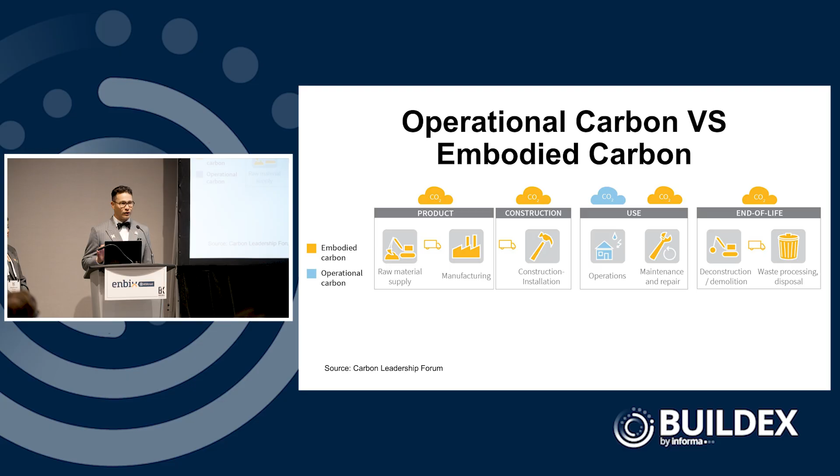Now we also have what we call life cycle assessment, or LCA, as the industry commonly calls it. The LCA document covers a product life cycle in either cradle to gate - so cradle to gate will be A1 to A3, which just covers the manufacturing process of the product. Then there's also cradle to grave, which goes from the manufacturing process all the way to the end of life. And finally there's cradle to cradle, which is if you start off being able to recycle materials and reuse those materials - that would be considered cradle to cradle.

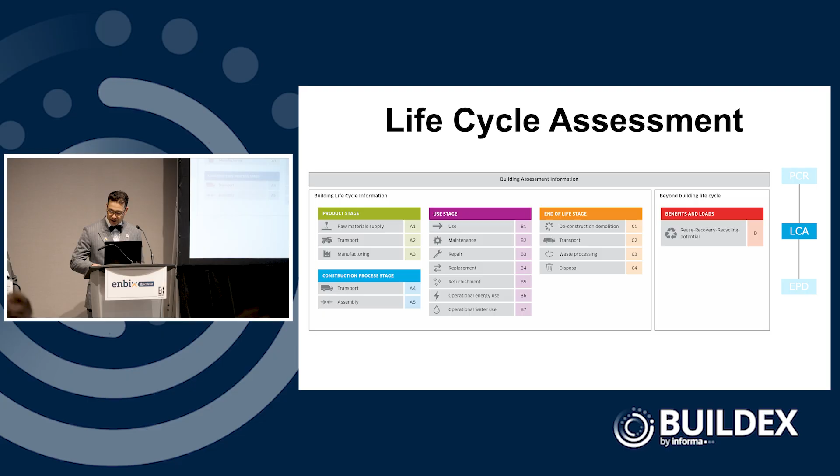With the life cycle assessment they've conducted to determine the environmental impact of either the product or buildings, there are 6 main areas or impact categories that we look at.

So you can see we have global warming potential, which is a no-brainer. Depletion of the stratospheric ozone layer, we definitely don't want that to happen. And acidification, so acid rain, we know how much that impacts the environment.

Eutrophication, which is a measure that uses the potential contribution to nutrient runoff and damaging aquatic systems. The formation of tropospheric ozone, so that's trapping ozone in or providing a layer. And then finally, depletion of non-renewable energy resources. That's the areas that we look at with the life cycle assessment.

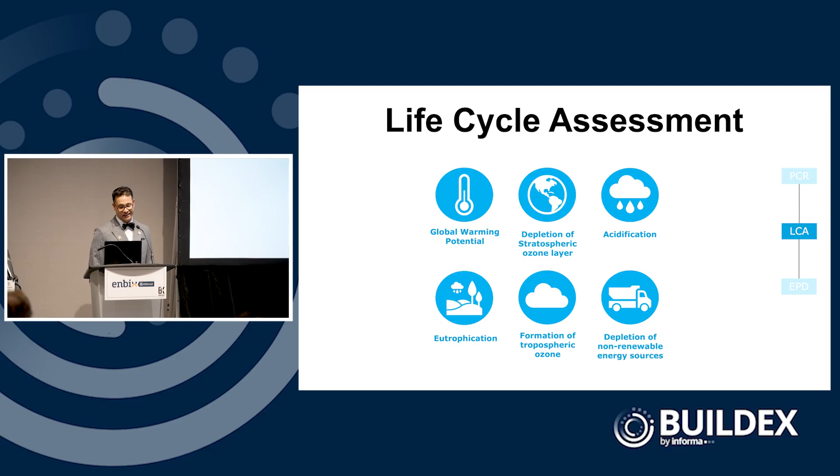So when it comes to EPDs, or environmental product declarations, these are important documents that we're going to see a lot more of. I know as a salesperson before, we used to sell a lot on technical data sheets. Now I think the future is going to be with EPDs.

So the way EPDs work is, first you have to establish a product category rule so that all the products in that category are judged in the same form. Not every product has this yet, but I know they're all working on that.

And then from the product category rule, we use a life cycle assessment to determine the impact of the products on the environment. Once we've collected all that data, we're able to produce an EPD. Then that EPD goes to a third party to be validated, and finally it's publicized.

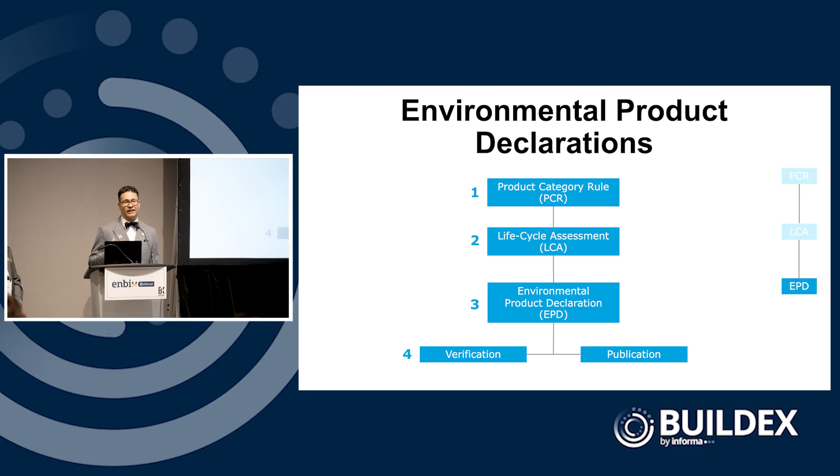Now, EPDs are actually very expensive documents for manufacturers to produce, so a lot of times you'll start to see just industry average EPDs. Some manufacturers will go to that, some products will be there if their industry especially isn't that large, but the manufacturers that invest in doing their own EPDs really give you an accurate guide on what products you're installing and give you accurate information on your material choices.

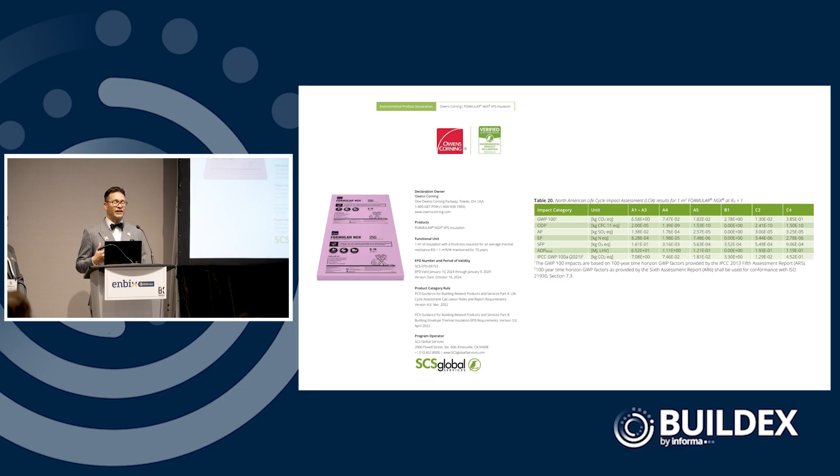For example, Owens Corning, coincidentally I work for them, they have one as well, and it's just to show you an example, but there's a lot of manufacturers out there that do have EPDs. So I encourage you when you're doing a material selection, take a look at that document as well, not just the technical data sheet.

Now, there's what we call a common materials framework, and these are basically language that we're trying to make the industry adopt so that they can have the same language across the board, so we're all saying the same thing.

So there's ecosystem health, which works with the environment, and we want to make sure that we're using products that don't damage the environment. We have social health and equity, which relates to human rights - we don't want to use materials that are maybe produced in a non-ethical way. Then we have circular economy, so if we can use products that can be reused again in the future, we like to use those as well.

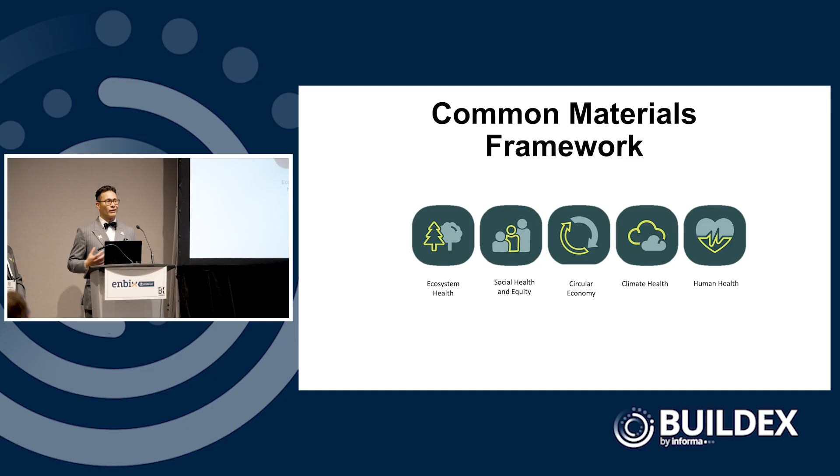Then there's climate health, so of course we want to make sure the climate isn't impacted, and let's not forget us in the room - human health. We want to make sure we're not impacted by the products that we pick.

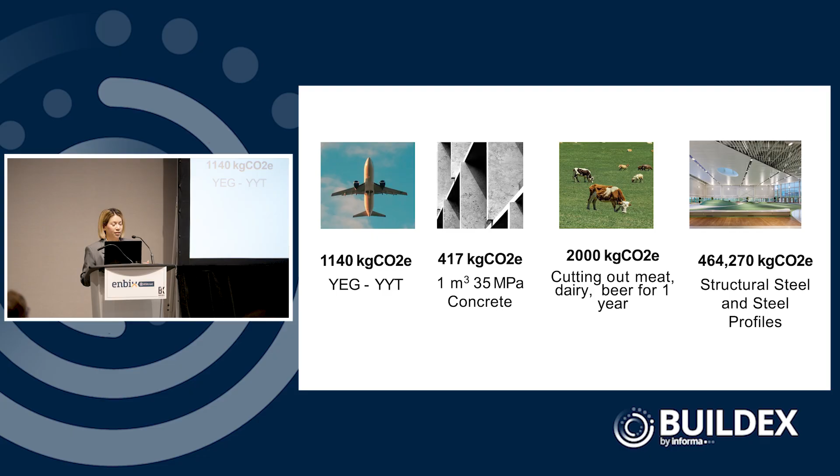It's nothing compared to one project I worked on, a recreation center here in Calgary. Just the structural steel in this addition we did—and we tried our best to identify low carbon steel and opportunities for repurposing—but you'll see that materials really do have the biggest impact. Even if you went vegan, it doesn't come close to just one material on one project.

Going a bit more in depth into social equity, materials are one of the biggest contributors right now to forced labor. Forced labor not only includes child labor and individuals being held against their will, but also the incarceration issue we have in North America. It was shocking to me to find out that a lot of the manufacturers we commonly specify use incarcerated individuals who aren't being treated in an equitable way, and who don't really have a right to fair pay or a fair situation.

This is starting to come down into some of the manufacturing plants. For example, a local steel manufacturer in Canada is one of the only manufacturers globally that has a social equity certification for their steel. I thought that was a really good kudos for Canada.

It really ties into the fact that as of 2023, Canada has a law covering anything entering Canada, regardless of whether it's a construction material or not—there are laws against forced labor. With the greening government strategy and whatnot that the federal government is pushing, that's really trying to emphasize that we need to get better at how we evaluate and import materials.

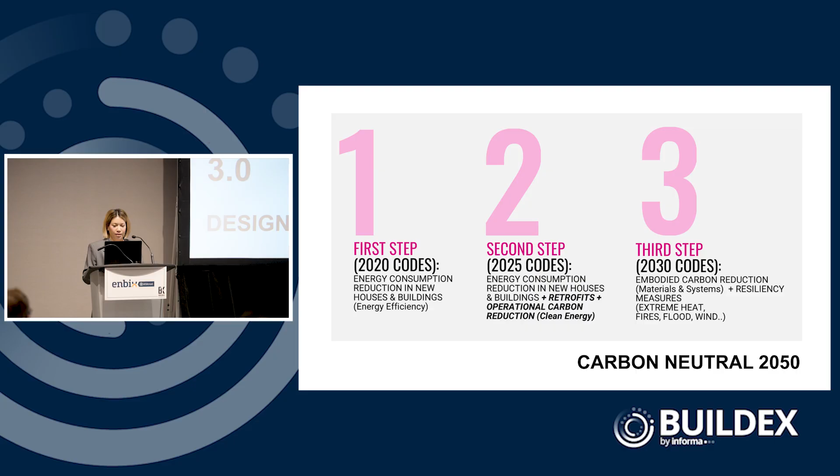So I'm going to go into some design considerations. Some easy wins that you can have is really introduce it early. The design really has the biggest influence. So being very critical of what materials as well as how you use those materials, work with your engineer to figure out placement of structural support to really reduce the amount required.

And to also meet your design service life of your building. The ones further down the list are harder for a consultant to actually have an influence on, especially in Alberta where our grid is considered a dirty grid. We don't have that luxury like other provinces do where we can quickly electrify the building at not much of a cost.

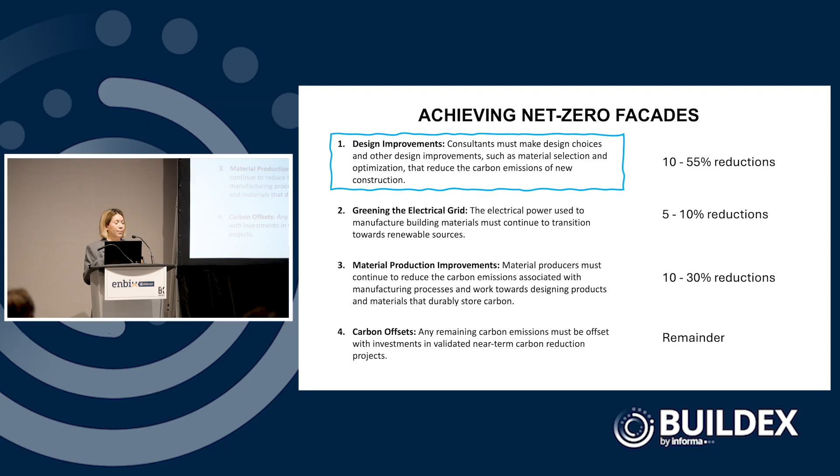And then from a material production side, we don't have the greatest influence on sourcing only true low carbon materials or materials that can achieve different sustainability attributes like carbon sequestration. That's currently in development with some of the concrete work happening in Edmonton. There's a lot of investment happening in capturing the carbon that comes off of heavy emitters from oil and gas and putting it back into the manufacturing of cement.

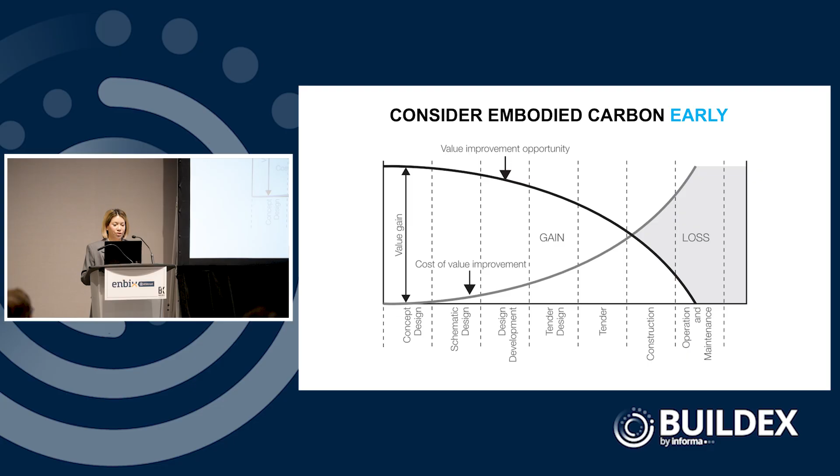And like I mentioned before, the earlier you start to have discussions on embodied carbon, the more you reduce the cost and improve the ability to have that actually achieved on your project. The later you wait in the timeline of a project, the less likely you are to achieve that, as well as considering just the volatility of the supply chain.

And then from conducting a life cycle assessment, this is just our recommendation on when best to involve the consultants as well as the client, and what different deliverables you can implement on your project to really achieve significant embodied carbon reductions. I always recommend, regardless of your procurement or contract method, have that information as early as schematic design and have it priced, because a lot of the materials aren't easy to get low carbon options, and with the current situation we're in with tariffs and everything, it just adds an added layer to it.

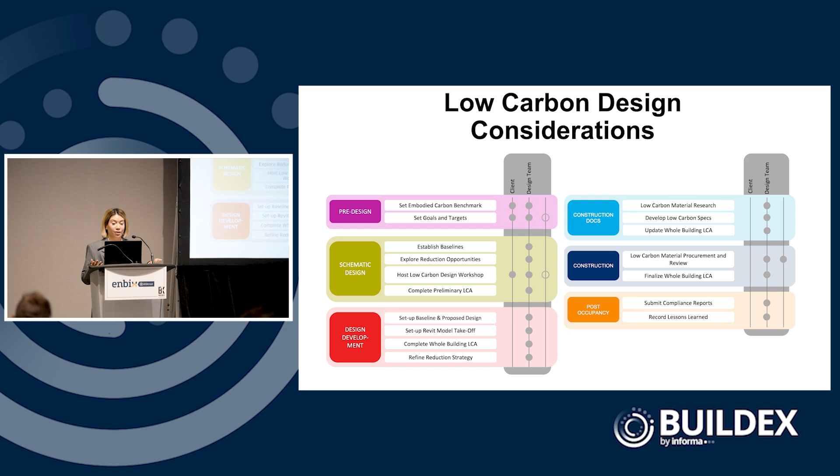Another option I would recommend is having separate prices in your bid so you can see what the cost differential is. And if you have the option, use less materials. I think towards the future, we're going to start doing more adaptive reuse on our projects.

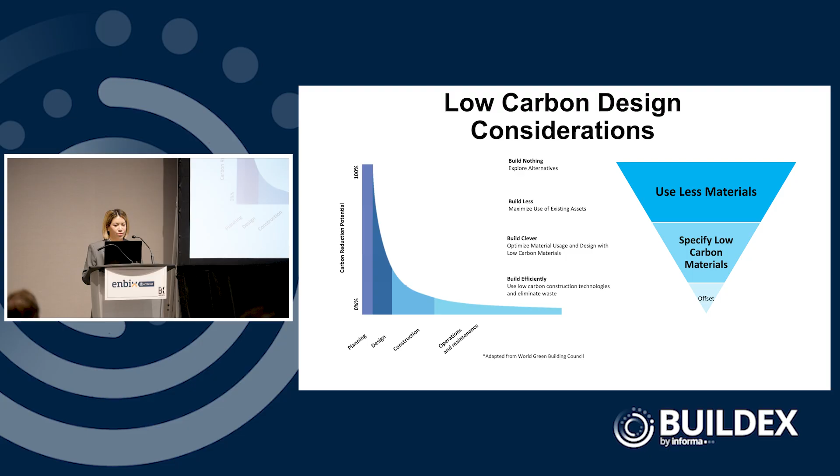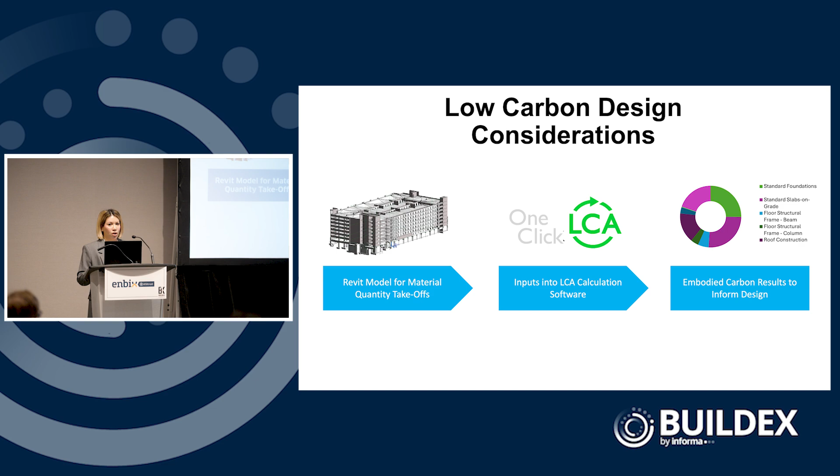Here's another high-level workflow we recommend: having constant life cycle assessments done at different phases of the project to evaluate your current design, as well as conducting life cycle cost assessments to see if your embodied carbon reductions also have cost considerations. I'll pass it off to Andrew.

Thanks, Stephanie. Raise of hands, show of hands—who likes carbon? Okay, good. I was hoping no one else would bring their hand up.

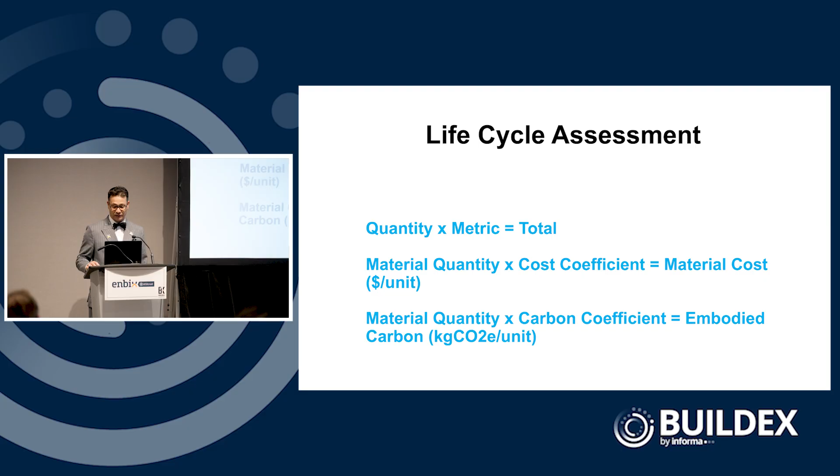When we start looking at total embodied carbon emissions, sometimes in walls especially you have multiple products in there, so you need to calculate them all—take them all into consideration to get that total embodied carbon number.

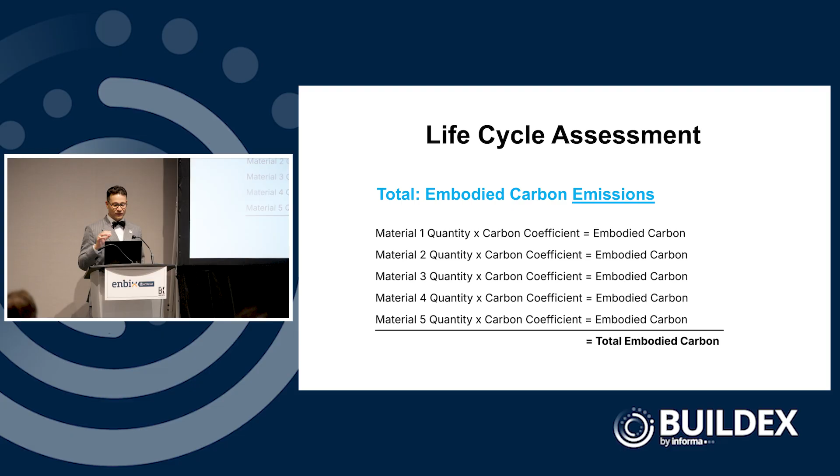So once you've done all that math—because for everybody who likes math out there, you've got all that math—you got the total embodied carbon, then you can start working on the average for the embodied carbon intensity, right? Because that's something we want to look at.

You take the total embodied carbon and divide it by either the square footage of the building, or it could be the specific assembly or specific type of product you're using, to determine your embodied carbon intensity. It's not a calculation normally used, but it's something we're starting to use more because we're really starting to take this into consideration.

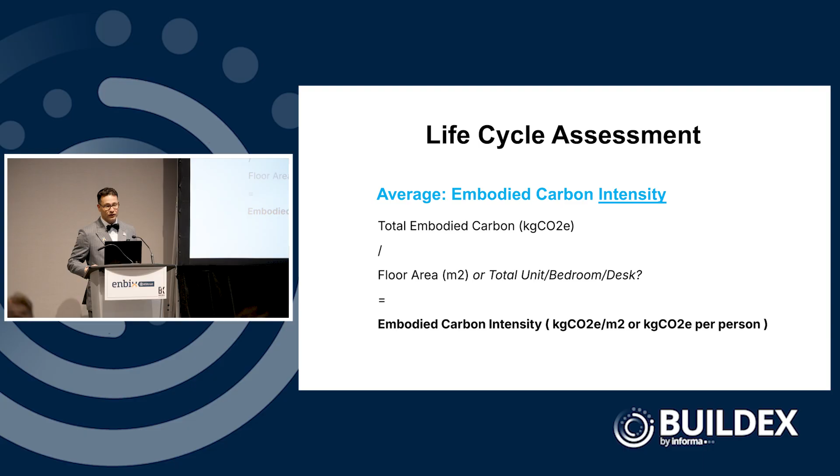So now that you know that piece, while you're doing all those calculations, there's other stuff to take into consideration, especially in the walls when selecting your cladding attachment strategy. What's the weight of the cladding? What's the environment—is there heavy wind loads, is there seismic? Building orientation is a big one.

I was just watching a presentation on the new arena, and because of some of the demands, they had to face certain areas a different way, and that changes how they have to design. Combustibility requirements—are you building really close to something, or do you have space where you don't have to take as much of that into consideration, although combustibility is an important thing.

Allowable wall thickness—you're putting up a new building downtown, but it's between two old buildings, so you don't have a lot of space. Substrate—that's a huge one right there. What are you attaching to?

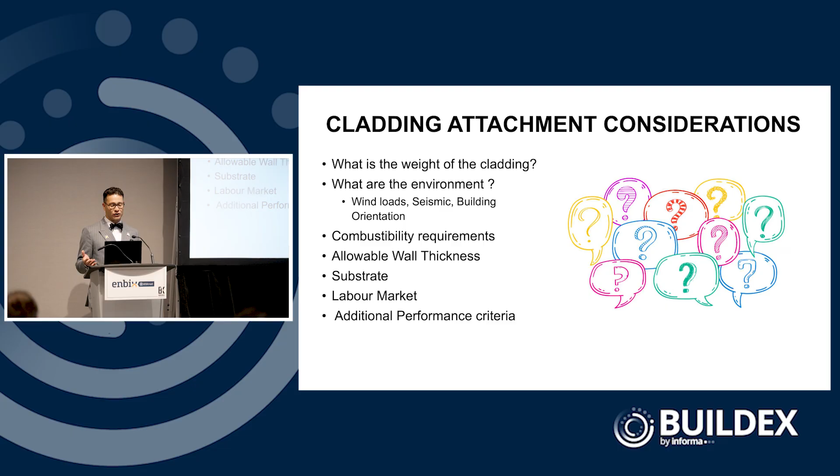Followed by labor market. You might love EIFS acrylic stucco—you're like, this is a beautiful finish, it's great—but you don't have the labor market for it because some people can't do it correctly. And then there's additional performance criteria. You're like, what's an additional performance criteria? The building code, right? So they throw that in there too.

So you've got to think of all those things, but you still have to make sure you're hitting the building code as well. Most of the provinces in 2024 had adopted the 2020 building code—I know it's a long gap in between—in some way, shape, or form. I think BC calls it the BC Step Code. In Ontario, it's SB 12. Everywhere else is pretty much the National Building Code with the province's version.

But here's an example of what's changed from 2015 to 2020. Before, we used to look at just opaque assemblies, so we moved from what we call a nominal wall. We used to put an R22 batt in the wall, call it an R22 wall, dust your hands, and walk away. And then we realized thermal bridging is a thing.

Wood studs or steel studs are not R22, so we had to calculate that, and that's what happened in 2015. So now we're calculating an effective R value, taking into consideration the studs in the wall.

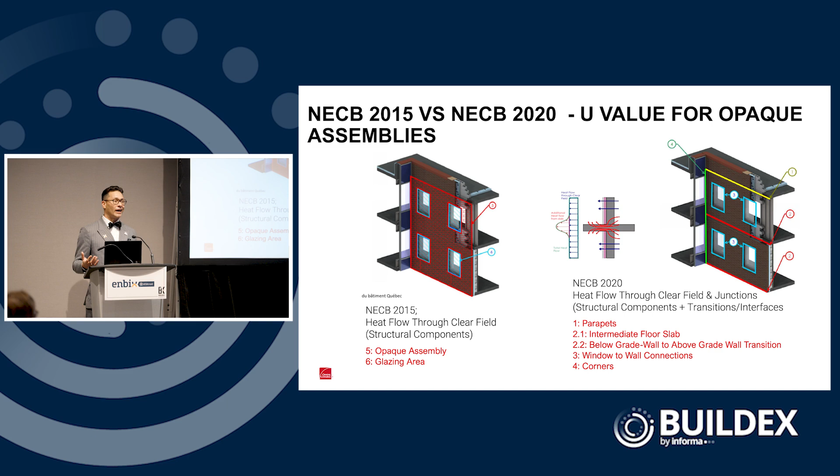And then finally, we moved to 2020, where we're like, okay, well now we got the studs, but what about all the other junctions? The ceiling, the floor, around the windows, all those areas. Those are areas where energy can leak out, so now we have to take those things into consideration as well.

So showing a similar slide that Stephanie had shown. Step one was to adopt 2020 code, and that increased the energy efficiency of new construction. So we started to do that. We're like, we got to change, we got to start now, we got to start building the right way. So we adopted that, that was step one.

And then step two, which is coming out December 2025 - they're probably going to wait till the 31st at 11:59 - but that's when the next code edition comes out, and that's going to have retrofits and operational carbon in it.

Now, when it comes to this particular code, we're seeing a lot of provinces saying they're not necessarily going to adopt the code itself, do a full re-up. They're going to probably just add some addendums. They're going to take all the stuff - because some stuff hasn't changed as much - so they're going to take all the stuff that's changed and add it as an addendum, as opposed to redoing the code altogether.

I'm pretty sure that's what's going to happen in Alberta. And then finally, in 2030, like Stephanie had said, task groups are going on right now talking about GHG emissions and trying to figure out the way to scale this properly so that we have an accurate measurement, because, again, like Stephanie said, every province is different.

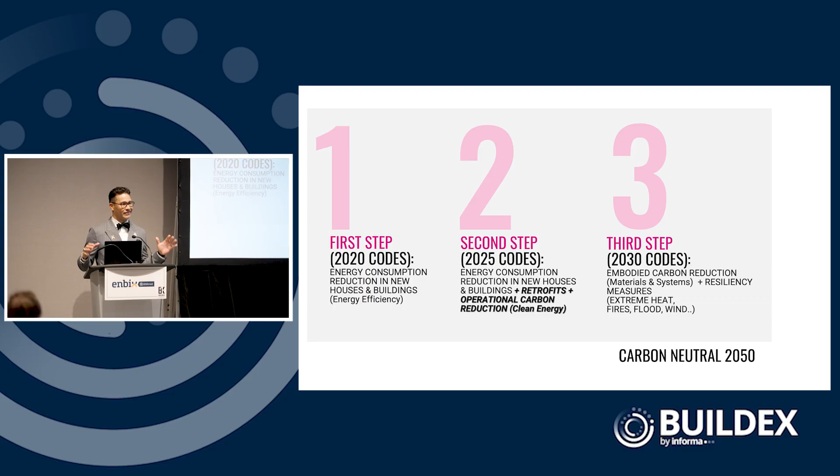You know, Manitoba has a pretty clean grid. And I was just at the CHBA national fall meetings, and they kept talking about how dirty Alberta's grid is. And I'm like, okay, it's getting better, and it's going to continue to get better every single time, but we can't be the butt of all the jokes, right? We're doing our best, and I think that's a good thing. We're very conscious of that, and I think we're making design choices towards that.

So let's talk first about operational carbon. What can we do to reduce that? Now, just so you guys know, we talked about this - operational carbon is the carbon that's produced when the building is in operation.

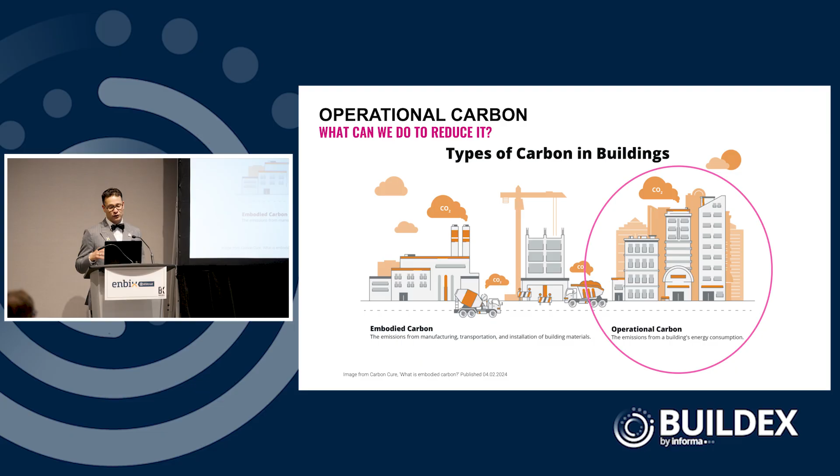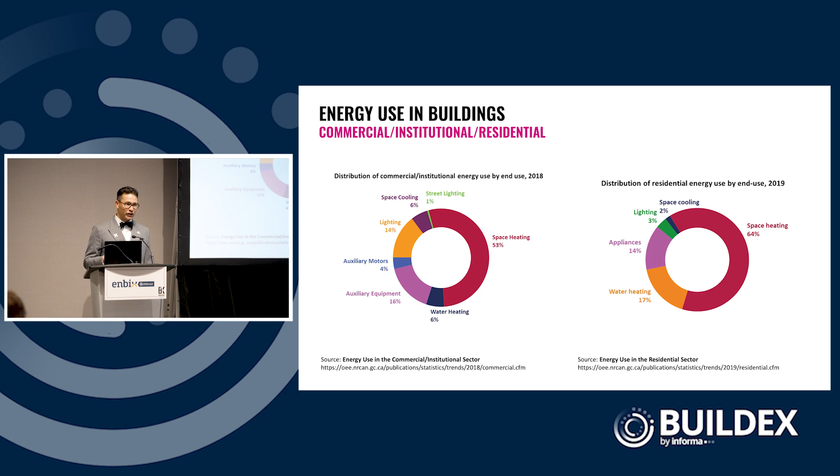NRCan put together some studies, and this information is available online talking about where energy is used in buildings. So we can see by the charts, whether it's institutional or commercial or residential, over 60% of energy in a building is from heating and cooling that building, right? So one of the things we have to do is find a way to reduce that, and a big contributor to that is thermal bridging, right?

Thermal bridging occurs when a component with relatively high thermal conductivity bypasses the thermal insulation, right? And like I was mentioning before, wood is not R22, it's more like R1 per inch. So we have to take that into consideration.

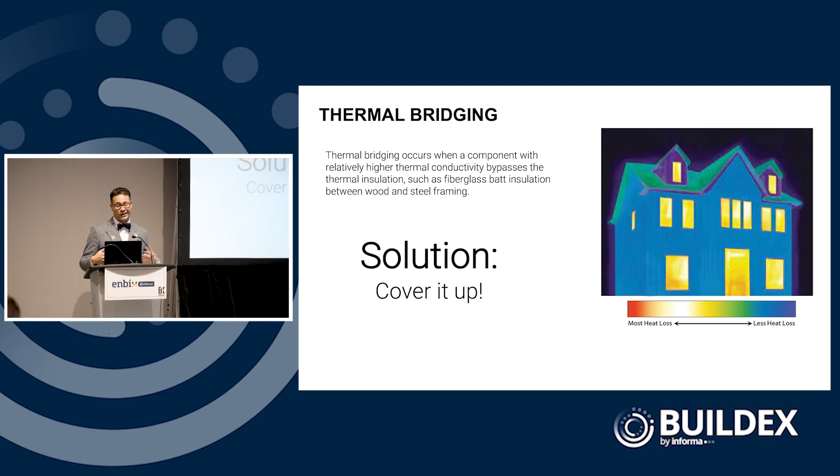So one of the solutions you can do to help that is to cover it up, right? We wrap the house, put it like a big sweater on there. Now there are other solutions like that - we can talk about air tightness as well. That helps too, so I don't want to discount that, but as an insulation guy, I'm going to talk more on the insulation side.

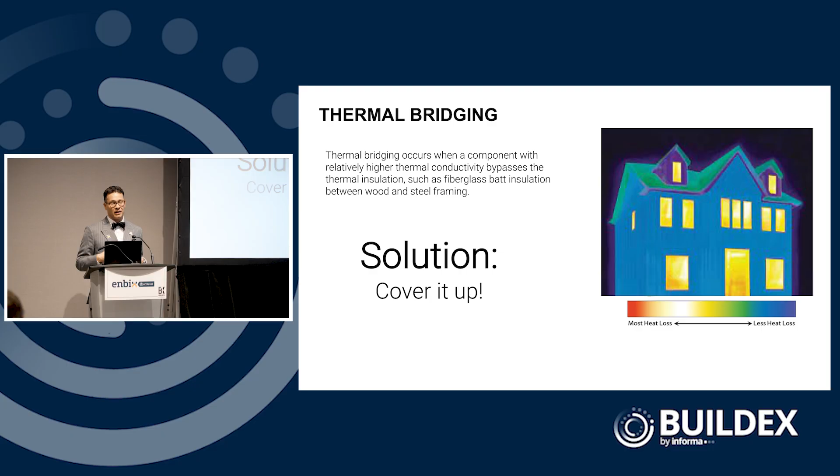All right, so now we've seen this, we're like, oh, we'll cover it up. We now know we can reduce the energy that's used in the building, but not all exterior insulation strategies are created equal. So if we take a quick look at this cladding attachment performance chart, we can see...

We're going to do this with 5 inches of exterior insulation. We're going to call it all exterior insulation. We decided that, you know, we're going to use vertical girts. Hopefully no one here is designing with vertical girts anymore, because we can see when we use vertical girts, it's just an extension of the stud. So you're getting a similar type of thermal bridging where you're only getting 50%, or just over 50%, effectiveness of that insulation on the exterior, right?

You're almost better off just continuing to use cavity insulation at that point. But then, if you start to go horizontal, we see a change. Because we've disconnected the stud a little more, with less touch points, we've now increased the performance of our insulation.

Then we said, well, let's do a cross grid, because that sounds like a great idea. And that worked out better because we continued to improve the insulation.

But some of you in the market know we have other systems, like clip and rail systems, and direct attachment systems which use long screws and strapping. In most situations, a clip and rail system improves performance because with the clips you have less touch points, right?

Wrong, because the spacing decreased when we used a lot of clips, we actually reduced our effective R-value because the spacing was really tight.

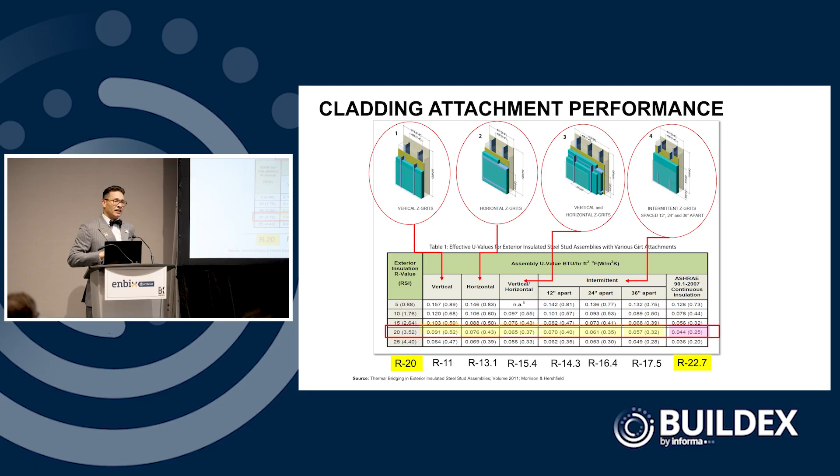And finally, if you go with a direct fastening approach, you get a lot more effectiveness, usually around 95% effectiveness for the insulation. Calculating with all the other components, you get up to R22, with all the components in there, the drywall, etc. So you can see, just because you put exterior insulation on, it doesn't mean the job's done. You have to take the strategy into consideration.

When it comes to thermal envelope calculations, sometimes it's hard to get the modeling done. Luckily, thermalenvelope.ca is a great website you can use as a resource. This website will show you opaque walls, junctions, floor, ceiling, roof, and have all those calculations in there, with a lot of examples from different manufacturers.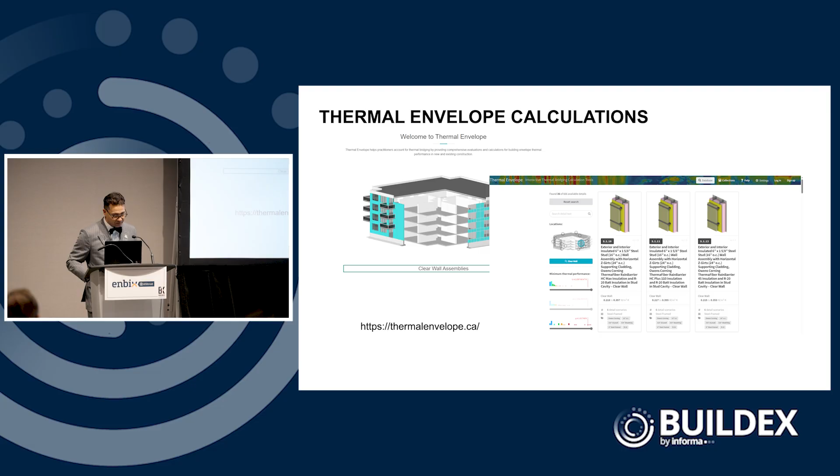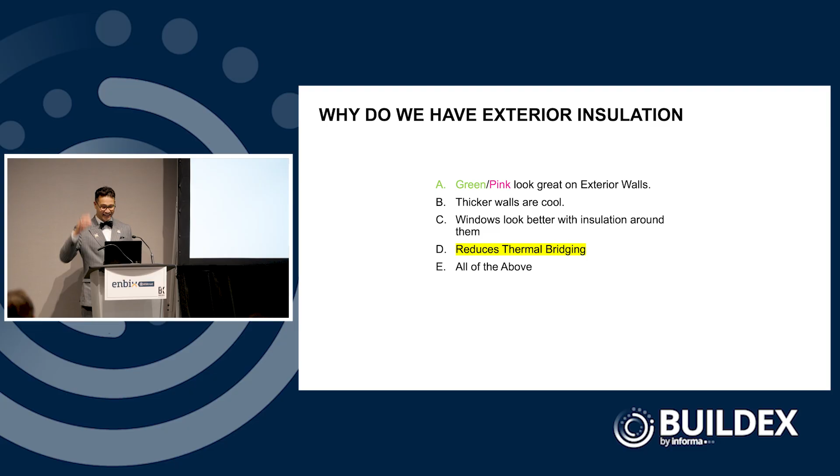Okay, you've gone through that part. Now I've got a skill testing question for you right here. I hope you guys were listening and writing down notes. Why do we have exterior insulation? Is it A, because green or pink insulation looks cool on exterior walls? B, thicker walls are cool? C, windows look better with insulation around them? D, reduces thermal bridging? Or E, all the above? Who's got an answer? Come on, anybody here? Who said D? Put your hand up if you had D. I'm trying to see who was first—I think it was you in the back. Oh nice, there we go. Okay man, my arm, I just got a lot of power in there. Okay, so you were right.

Reduces thermal bridging. So now the question starts to ask, are we going to go all exterior walls, or are we going to go with a split or hybrid wall situation?

There are different advantages and disadvantages to both. If we think about an all exterior wall, we've got all our control layers on the exterior, everything's on the outside. We see a lot of commercial construction go like this—it's one of those ways where we've taken care of everything, it's all on the outside, we don't have to worry about that. Then there's the hybrid wall, which makes you take into consideration the cavity insulation as well as the exterior insulation.

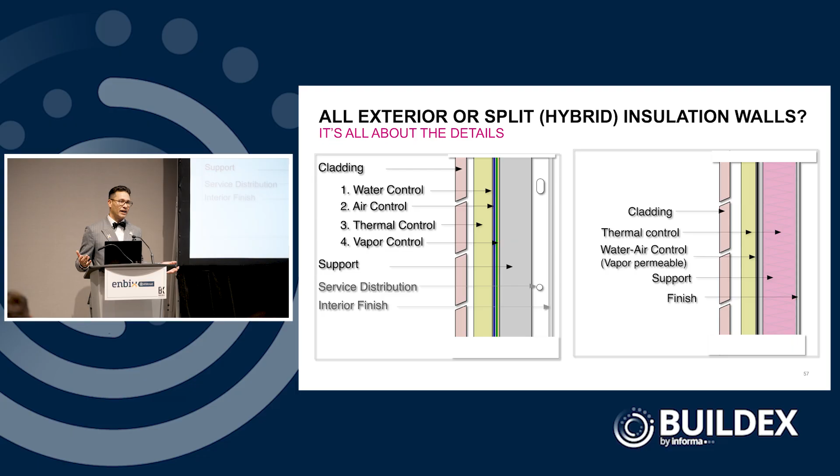So a little bit more of a detail, but it's all about the details. Both systems work well. It's just a matter of whether they're detailed correctly, as long as we're making sure we do the right thing.

When you compare both systems when it comes to effective R-value, say we use 5 inches of mineral wool with cavity insulation versus 8 inches of mineral wool as the exterior example. Both have the same clear field number and the same overall performance, so from a thermal performance perspective they perform well. But there are certain advantages to going with a hybrid approach versus all-exterior insulation, and I'm going to show you why.

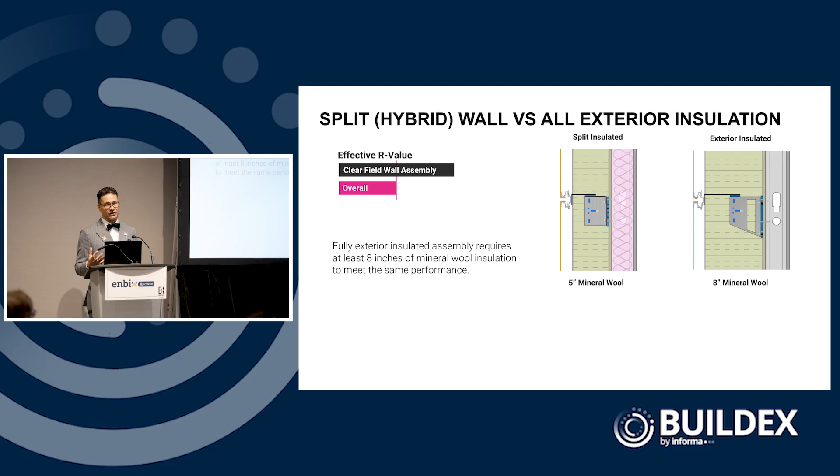It starts with the embodied carbon piece. We know what embodied carbon is - it's everything but the operations.

Before I get into embodied carbon, one area where you can find that information is through EPDs. Product transparency is important, making sure you read EPDs. There's industry ones, then manufacturer product-specific ones, and if manufacturers really want to get into it, they can go manufacturer product plant-specific, providing a lot of information about the product getting to your specific sites. Product transparency summaries are important, health product declarations are important too, and just be aware of greenwashing.

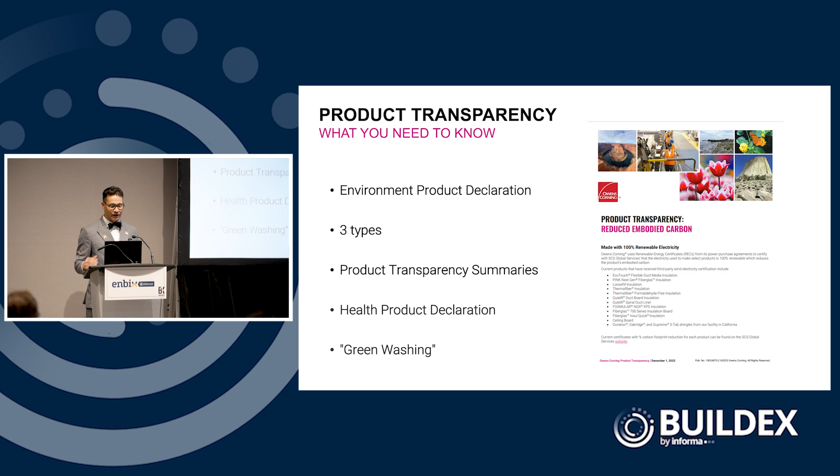We talked earlier about the product category rule. We want to make sure that when we're evaluating products, we all evaluate them the same way.

So let's talk about the impact of insulation on embodied carbon. There's a bunch of different ones, and I don't expect you to see this closely, so I'm going to bring this a little closer. This is a study done by the city of Nelson.

They put together a material carbon emissions guide. They took all the industry EPDs for all the insulations. They did it for other materials too - I believe concrete, steel, a couple others - so I encourage you to check out that guide.

Within that guide, they go through different types of insulation. Looking at exterior insulation, rigid boards, we can see XPS is one of the higher ones when it comes to embodied carbon. Then we see mineral wool in this - and again, these are industry averages, so some manufacturers can perform much better than this, and some perform worse.

And then finally you look at potentially carbon sequestering products. If you haven't heard that term before, these are products given a negative number because they absorb carbon before their production. Wood fiber board is an example of that.

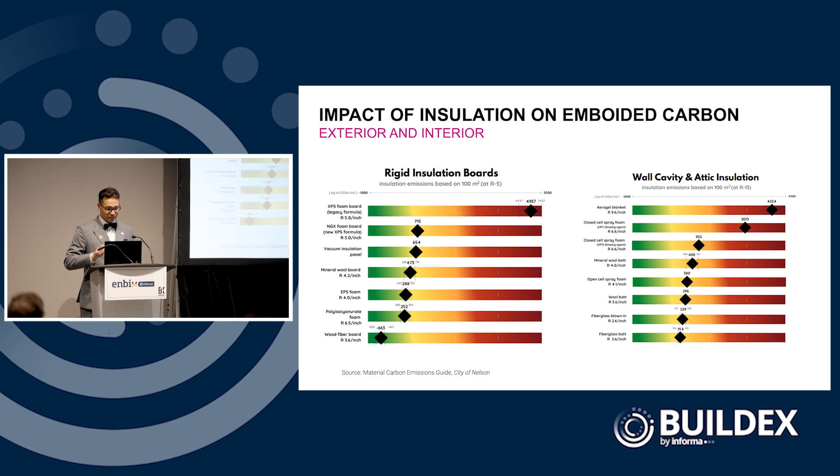Then we have wall cavity insulation. Going through some mainstream ones, we have mineral wool batts, wood fiber or wool batts, and fiberglass batts at the bottom. There are other carbon sequestering types of insulation as well that can continue to reduce embodied carbon in your wall assembly. I'm going to talk more about three that I'm more familiar with.

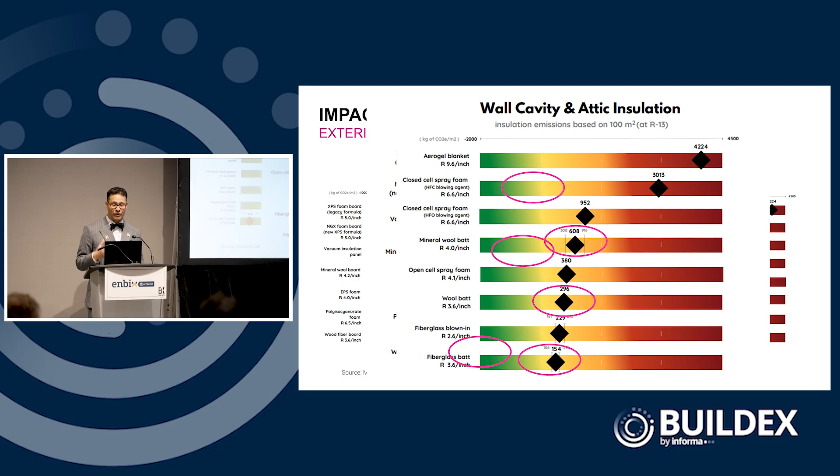I'm going to talk about XPS, mineral wool, and fiberglass, because these are the more common ones we're seeing out in the industry today. We took an EPD for all these products - a real one from a manufacturer, you can guess which one.

We reviewed three types of cladding systems with these parameters. We took the Z-girt system I showed you earlier - vertical, horizontal Z-girts - at 50% effectiveness. We took a clip and rail system at 75% effectiveness. And then direct fastening at 95% effectiveness.

We took a wall type where we wanted to achieve effective R23 in the wall. So we used R20 cavity insulation, which typically gives you about R11 to R12 depending on stud spacing, and then whatever amount of exterior insulation we needed to get to that R23 effective wall value.

And the measurement took into A1 to C4 - who remembers what that means? A1 to C4, cradle to grave. Okay, so that's what we did.

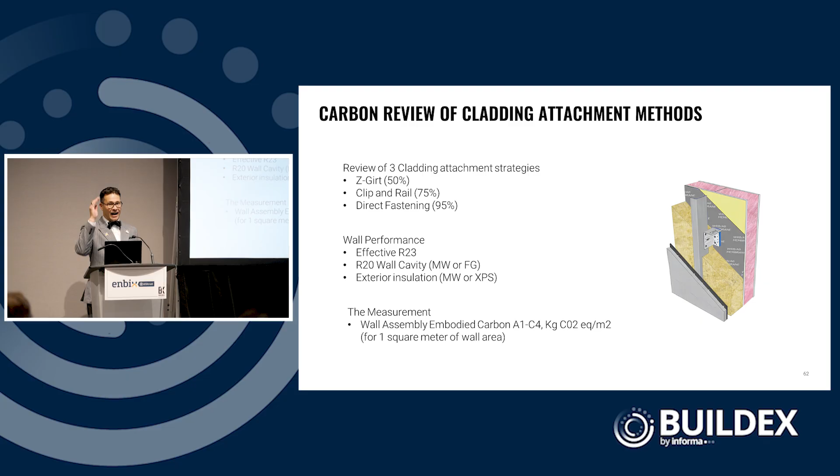I have multiple slides on this, but I won't go through them too heavily - I'll just give you the results. If you wanted the thinnest wall, this is based only on the insulation, not the components, because metal strapping would add embodied carbon right away since we know metal does that. So just considering the insulation pieces, this would be the thinnest wall you could possibly create, but it has a pretty high carbon level compared to, say, the wall with mineral wool and fiberglass, which is around 8.75 kilograms of emissions per meter squared. So you can see these are the results we got.

At first we'd think from an effectiveness perspective, direct fastening was the most effective, so we'd get the best performance, but that doesn't always mean we're getting the best performance when it comes to the environmental side. With the clips, we seem to get a little better environmental performance while still maintaining the performance we need for the wall.

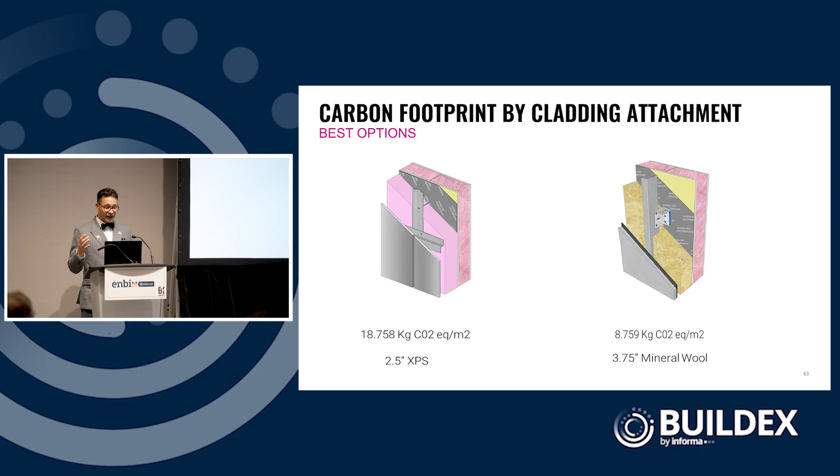Then, like I mentioned before, there are carbon sequestering insulations - a couple different ones available, from hemp fiber all the way to straw bale. Straw bale is one that's coming out, but I don't believe all these insulations have a product category rules set up yet, so once that's established, we can make sure they're all being evaluated correctly.

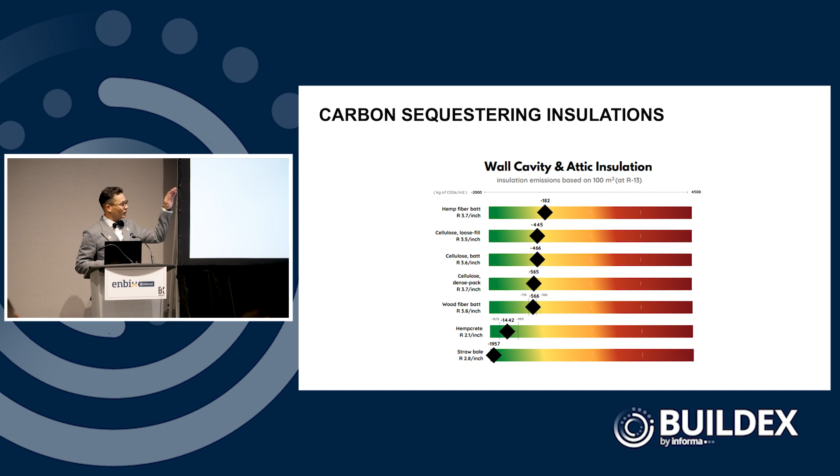Now, when it comes to carbon payback period - something people look at a lot, thinking 'if I use this insulation, how fast am I going to get my ROI on the carbon?' - a study was done by NAIMA, the North American Insulation Manufacturers Association. They hired a consultant to determine where the carbon payback was, and found that if the wall is under 2 kilograms, typically your standard residential construction baseline, the embodied carbon would be recovered in the home within 1 year.

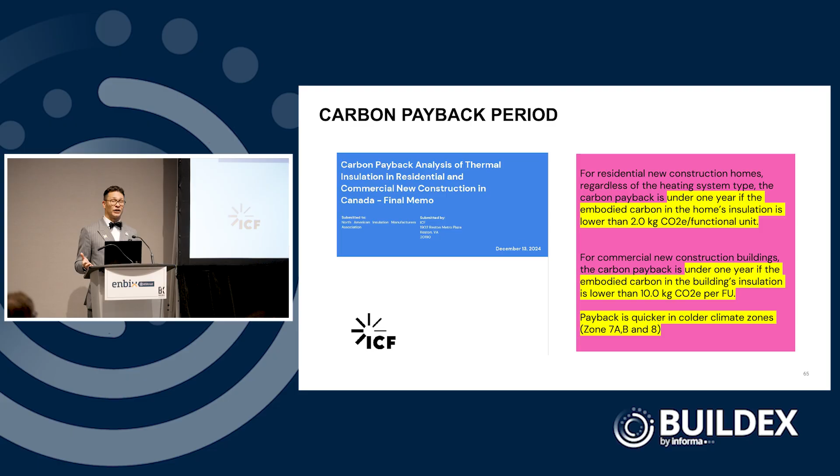When it comes to commercial, those are standard wall assemblies with mineral wool and fiberglass, which came in at around 8 kilograms - if it's 10 kilograms or less, you'll be able to recover it in a year. So if you use foam, people think it's going to add 3-4 years to the carbon payback, but it turns out it's only a few extra months depending on the type of foam you're using. So it's all about what you select for that.

Now, these are the resources I was mentioning before: the City of Nelson's Material Carbon Emissions Guide, check that out; the carbon payback analysis done by ICF; and then there are low carbon solutions - BC is really ahead of the game on this. BC Housing has done a lot of work here, and CLF in BC also has a low carbon material sourcing guide. So these are different options for finding third-party resources. But if you're looking for specific manufacturer resources, Owens Corning for example has a technical library and can provide environmental product declarations, plus other sustainability information.

Now I'm going to pass it back to Stephanie.

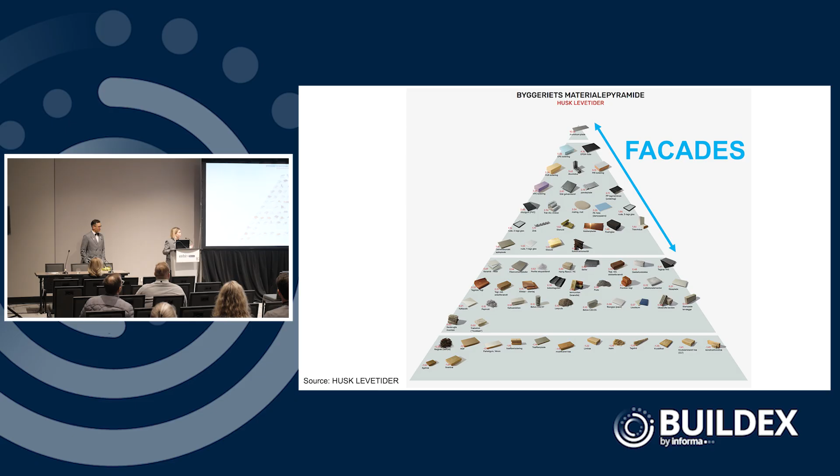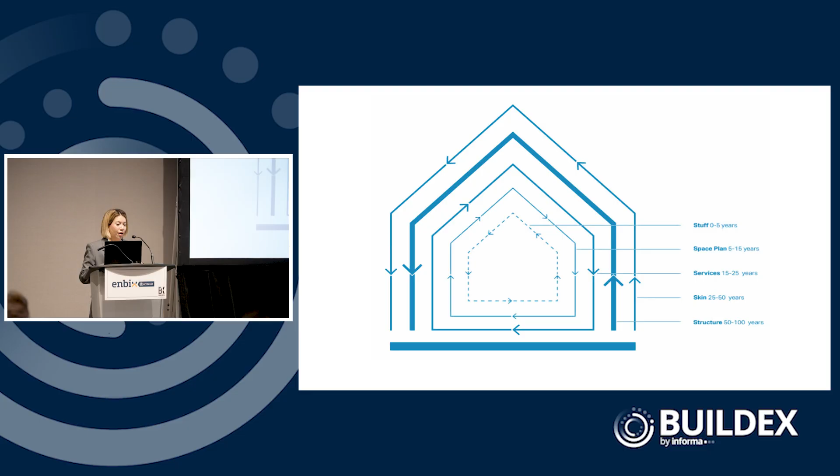Okay, so now I'm going to focus on some design considerations specifically focused on facade materials. Related to conducting a life cycle assessment, it's really important that your facade materials have a design service life of at least 25 to 50 years. That is not related to the warranty - it's related to a calculation of how long a material will last and the maintenance frequency it will require.

I'm going to start focusing on the different individual buckets from the common materials framework. The first one, ecosystem health, is focused on preferring products that support and regenerate natural air, water, and biological cycles through life, with a supply chain management focus. So here is a website I recommend using.

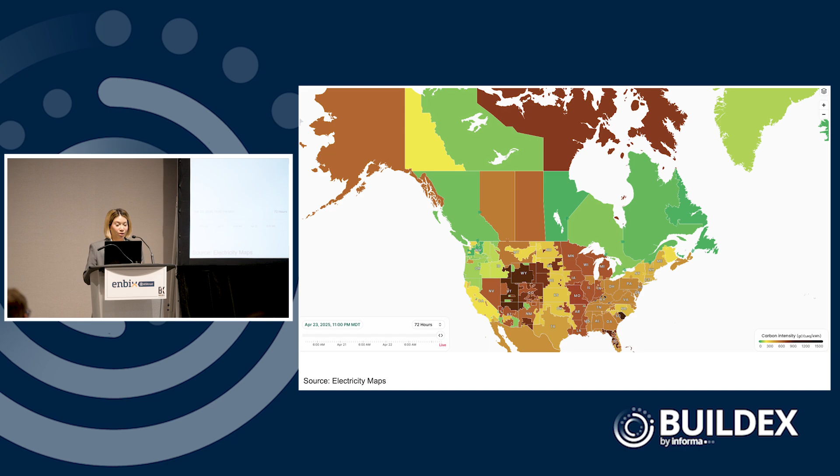The A4 to A5, which is the transportation embodied carbon, isn't that significant. It's really the manufacturing and extraction of the material that have the biggest impact on your ability to decarbonize a material. So here are some helpful steps when you want to prioritize that specific category.

Always ask your manufacturer for third-party verified environmental product declarations. If they have any bio-based materials in their product, ask for third-party certificates like cradle to cradle. If there's wood in it, a forestry certificate like FSC. Pretty much always anything third-party verified - that's really going to help you with greenwashing.

From a social health and equity perspective, that means preferring products and manufacturers that secure human rights in their operations and supply chain of the material.

These are the 12 problematic materials that have been identified. A lot of these are also materials that get used on projects. For me, it was really alarming that some of the minerals used in pretty much everything are one of the problematic materials.

Something else that's coming up is the synthetic and artificial ingredients that get added. What is the impact of the extraction - how toxic is it to that individual community? Also the end of life - how is it being disposed of?

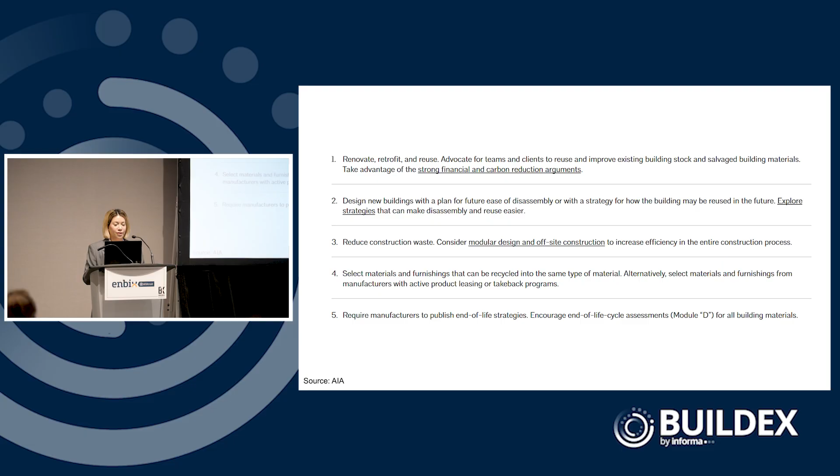They also have information on if you're conducting a whole life cycle assessment and you want to look at the D category, which is the end of life - that isn't commonly done on projects. They have a lot of helpful information on design considerations and structural life safety considerations for regrading different structural materials to be able to reuse them in a different building application.

The government of Luxembourg also has product circularity data sheets, which are starting to feed into the EU's move towards material passports. Personally, I think that is going to be the future within a global marketplace.

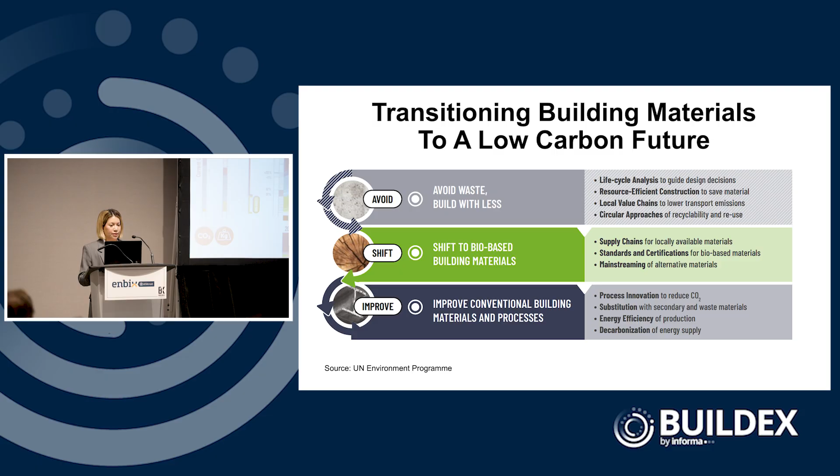Climate health, I think you're very familiar with that - that's the focus on decarbonization of materials. So the future is going to be moving towards low carbon as well as biogenic based materials - materials that have individual components that can be broken out and put back into the supply chain.

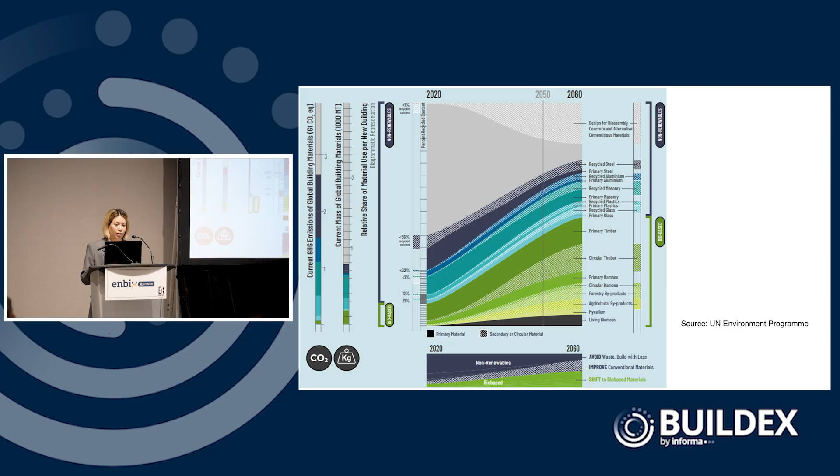There's a lot of work being done at different levels across Canada as it relates to that. A helpful guide for that, I would recommend the Carbon Leadership Forum - they have a lot of information about that.

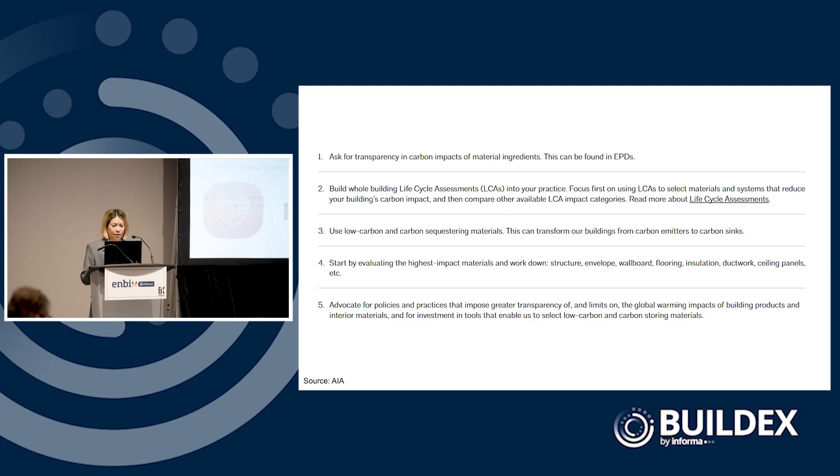From human health, that's really focused on prioritizing materials that are not detrimental to human life, from manufacturing to the installers. I think that is a group of individuals whose rights often don't really get looked at - how safe are our construction sites, how safe is it to install a lot of these materials. Despite something saying it's low VOC, doesn't mean it doesn't have carcinogens in it that you just can't readily detect.

This is becoming really mainstream right now with PFAS - those forever chemicals that are in pretty much everything. Luckily there's a lot of information coming out now, even from a personal consumer perspective. There are a lot of helpful resources through the Parsons School of Design, Cradle to Cradle is another great resource, and the Living Future Institute.

And then for those that are interested in specifications, the way to really hit all your goals on this is performance-based.

Really let the contractor or the industry figure out how best to achieve that. So specifically for embodied carbon, we typically do either a carbon budget, so all the steel has to have a maximum global warming potential where we factor in reduction into that number. But for more complex components like the building envelope, we'll set a minimum baseline, which is the maximum global warming potential we'll accept, based off of this industry A1 to A3 evaluation.

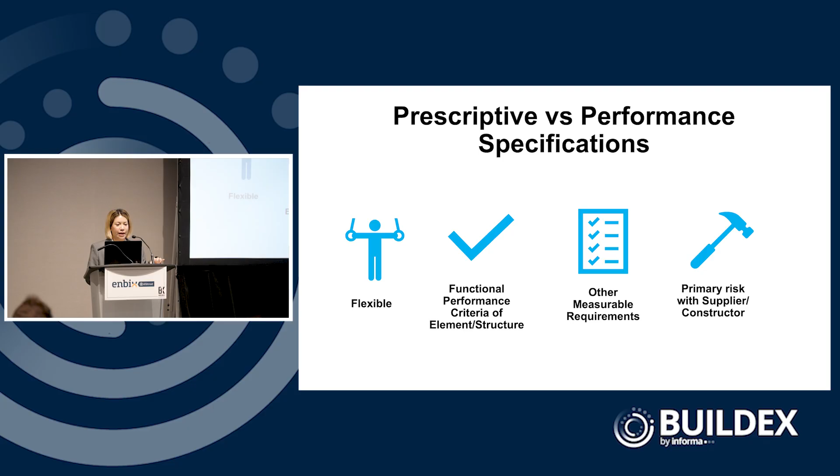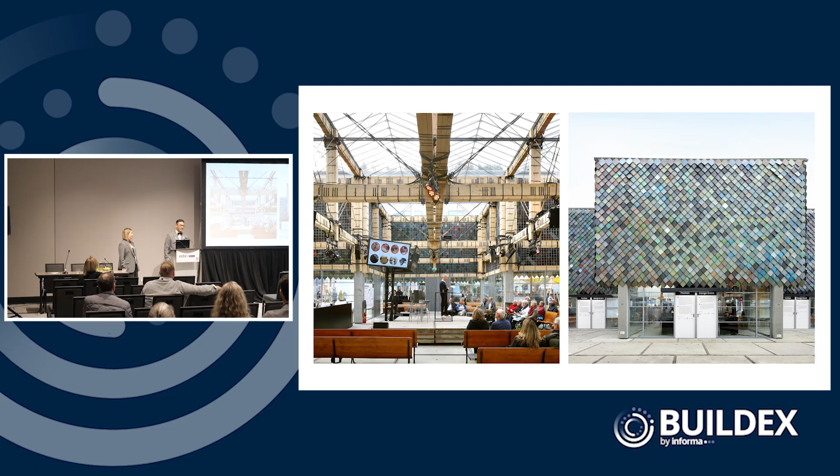So I will pass it off to Andrew to finish off one of the slides. Yes, this is my favorite slide. I'm very, very excited about this because this is potentially the future. We've talked a lot about modular building and doing stuff offsite and then bringing it onsite. So this particular project was done in Eindhoven, Netherlands.

It was submitted for Dutch Design Week, and this project, which is super neat, was all done prefab. Everything was cut so they didn't waste anything. Everything was brought to site. They set the whole building up, and once Dutch Design Week was done, they pulled everything down piece by piece and brought it back to the owner. So no waste at all, with one particular exception.

If you look on the right side screen, you see this facade. With this particular facade, they made it with the waste products of the city, made all these tiles, set them all up, and when they were done, gave the tiles back to the residents as a kind of souvenir for this project.

This project won a ton of different awards. It's called the People's Pavilion. It won Frame Awards in the category of Sustainable Design, the Dutch Design Awards in the category of Habitat, and the ARC18 Innovation Award as well. So a fantastic project, but this is a glimpse into potentially where the future is going to go, where we'll be able to deconstruct buildings and move them, taking those components and reusing them in other areas.

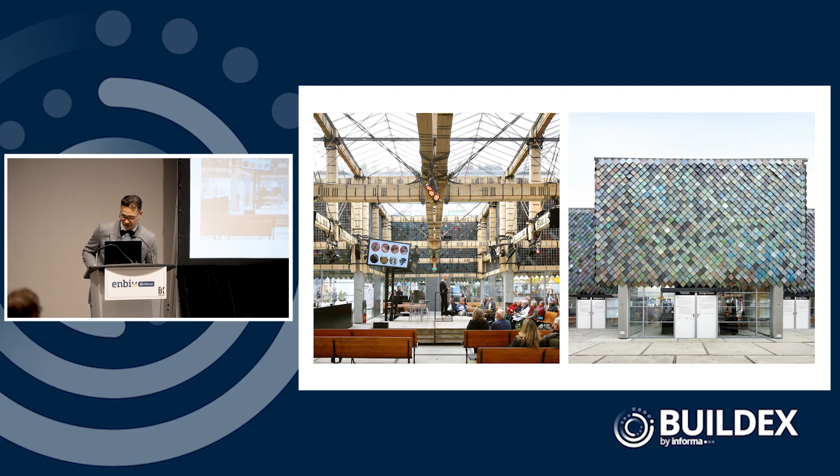And then to give a Canadian example where you can start to achieve some of these high sustainability metrics, there's Canada's first Living Building Challenge. This was back probably 13 years ago, when mass timber was pretty early in its days, so the majority of the building is designed and built to be disassembled. Everything was sourced within like 100 kilometers of that site, which was very difficult for me to source in the middle of the forest in nowhere in Ontario.

It was eye-opening for me at that time because even wood, and it's still an issue, is not entirely ethically grown and sourced across Canada. That was really alarming for me to find out. We had to get all the wood on this project from Quebec, from one manufacturer of mass timber that actually had their own forest, so they were able to control the entire supply chain and report on biogenic carbon in an accurate way. Some interesting features about this are the cladding, which is wood we diverted from waste, like 100-year-old historic wood that we just regraded.

We did mechanical fastenings, so if something needed to be replaced or the building needed to be disassembled, everything could come apart. The only thing that wasn't designed for disassembly was the stacked masonry on the project. But for the most part, this project had minimal materials because everything had to be extracted and installed within about 100 kilometers of that project site.